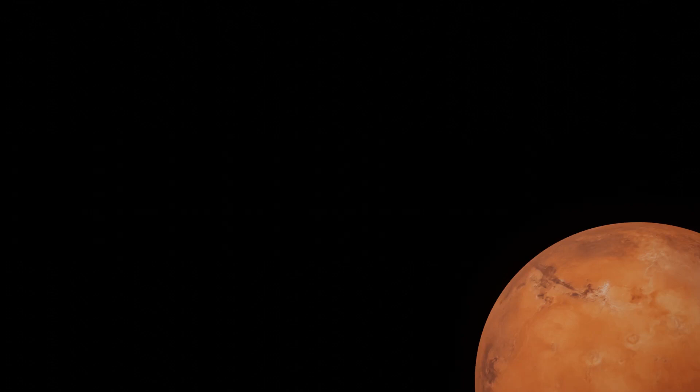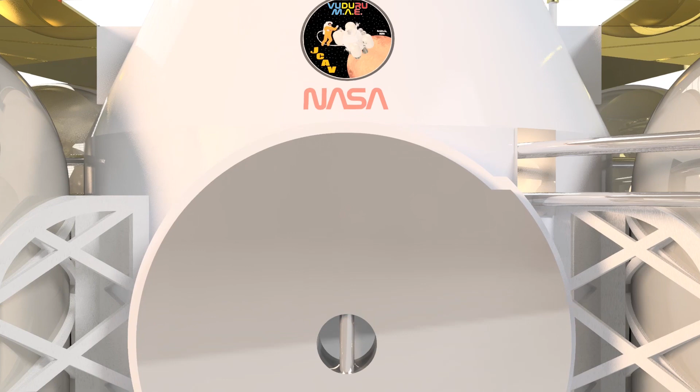All space exploration missions come from some sort of magnificent aura of passion, hope, and curiosity. They consist of individuals who push all kinds of barriers, whether in space or right here on Earth. For a mission as special as bringing the first humans to Mars, our team wanted to dedicate our name to Mae Jemison, who was the first in many aspects.

She was born in 1956, a time when racial segregation and injustice was vibrant. Despite the overwhelming societal obstacles, she became a member of NASA, aboard the Space Shuttle Endeavour, and launched in 1992. She was the first Black woman to reach space. For marginalized people like myself and many others, she became more than just an inspiration. She was proof that we can ascend beyond the structures that hold us down.

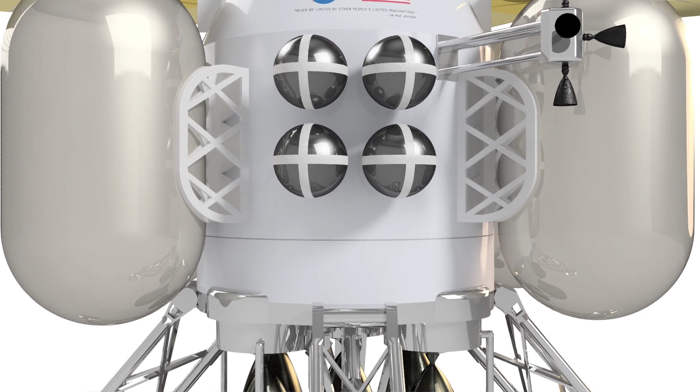As such, her acronym fits perfectly with our mission: Mars Ascent Expedition, Mae Jemison Crew Ascent Vehicle, JCAV. Featured as a decal on our vehicle, Dr. Jemison once said, 'Never be limited by other people's limited imaginations.' That is exactly what has driven us forward in designing and presenting the JCAV for you today. And for Dr. Jemison, thank you very much.

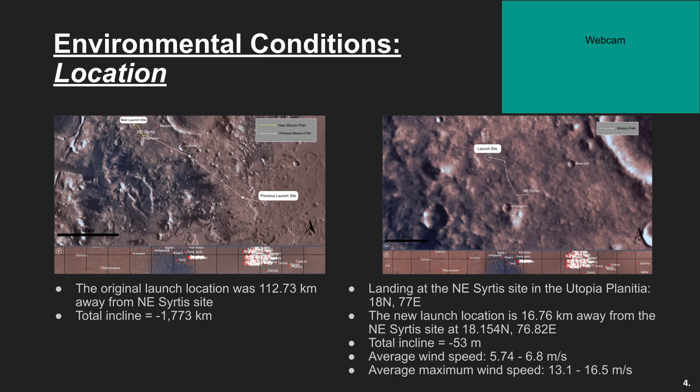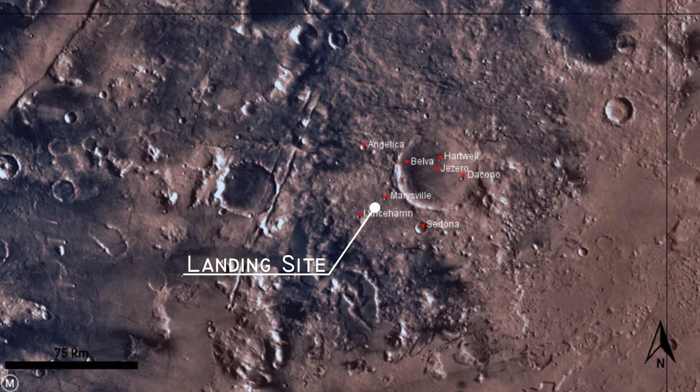The Mae Jemison VUDURU team has decided to conduct a mission around the Northeast Syrtis site, located at 18 degrees north and 77 degrees east near the Utopia Planitia region of Mars. Previously, our launch site coordinates were about 112 kilometers from NE Syrtis, with a total incline of 1,773 meters.

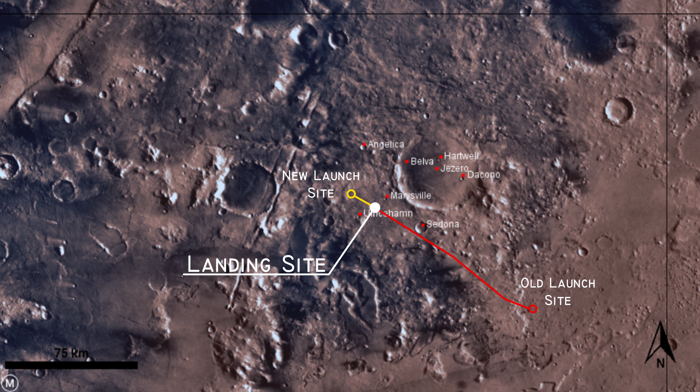In an effort to improve mission efficiency, a closer launch location was chosen. The new launch coordinates are 18.154 degrees north and 76.82 degrees east. This location was chosen because of its distance to NE Syrtis, which is 16.76 kilometers, its smaller incline of 53 meters, as well as its relative flatness. Along the path, the average annual wind speed measures about 6 meters per second, and the average maximum wind speed values can reach up to 17 meters per second.

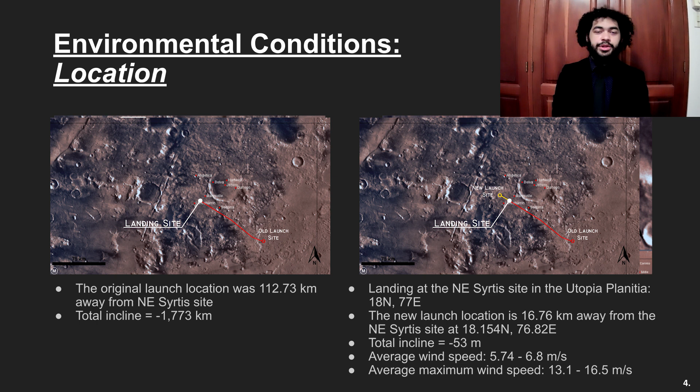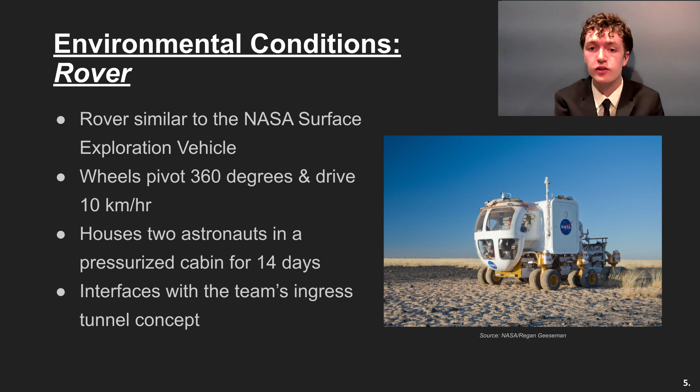The rover that the astronauts will use is based off of the NASA Surface Exploration Vehicle, a vehicle concept currently being tested. The rover wheels can pivot 360 degrees and drive 10 kilometers per hour in any direction. It houses 2 astronauts in a pressurized cabin for 14 days of living. The vehicle must also interface with the team's ingress tunnel.

Being a candidate for Mars 2020 landing sites, NE Syrtis offers a few geological features that make it a scientific region of interest. The overwhelming majority of the region is filled with surface and subsurface iron and magnesium clay, which is most likely aqueous in origin. Other regions around Syrtis are scattered with layered sulfates, olivine carbonate variably banded formations, crater-retaining mafic-capping rocks, and low-calcium pyroxene-bearing mounds. The abundance of minerals at the site suggests that it is a possible location for past life.

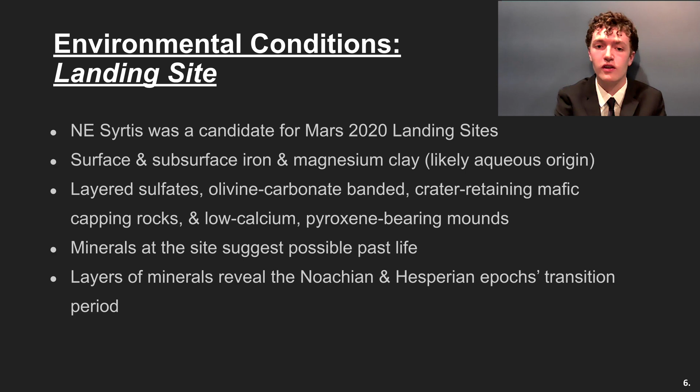The history of the site is revealed by studying the layers of minerals, which illuminates the transition period between the Noachian and Hesperian epochs. Studying the site would reveal much about the radical changes occurring during this transitional time.

The mission depicts that the Mars Ascent vehicle will launch from Earth on April 11, 2033 on the SLS and land on the surface of Mars on December 26, 2033 at a solar longitude, or LS, of 303.5 degrees. The mission will last for 30 days, so the crew will be on Mars until a solar longitude of 320.9 degrees.

This is optimal because certain regions of the northern hemisphere of Mars are the warmest during the Martian northern hemisphere winter, which occurs at an LS of 270 degrees and is just after the Martian perihelion, which is an LS of 260 degrees. The temperature will also be higher at the NE Syrtis site because it will be experiencing some of the lowest albedo values in the region.

The Mars Ascent Vehicle will be set to launch when the ERV reaches a true anomaly of 14.1 degrees with respect to the reference direction or apse line, which will be normal to the launch site. The MAV orbit will have an orbital inclination of 18.154 degrees and a launch azimuth of 90 degrees. This will put the MAV in the same orbital plane as the ERV, helping avoid extensive maneuvering. The MAV's orbit will form a 90-degree angle from its apse line to the intersectional node line between its orbital plane and the equatorial plane of Mars.

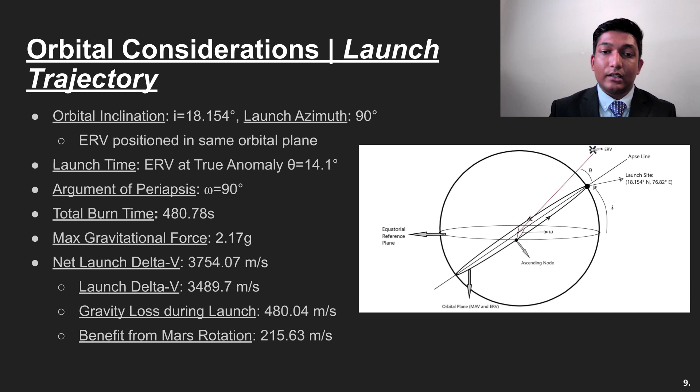The initial launch will take approximately 481 seconds to complete until orbit is achieved, and the maximum gravitational force experienced by the MAV during ascent will be 2.17 Gs. Due to the effect of Mars's rotation and the loss of gravity during ascent, as the MAV arrives in its 125-kilometer parking orbit, the net launch delta V will amount to approximately 3.75 kilometers per second. The low density of the Martian atmosphere will make drag a nearly negligible force, even during the MAV's ascent below the Kármán line up to an altitude of 80 kilometers.

So here's our specific mission profile. To start off, after doing surface operations and sample collections for most of their 1 month stay, the crew will begin launch preparations and will enter the MAV as they prepare for liftoff.

The MAV will then launch into the 125-kilometer orbit, requiring a total burn of 3,754.1 meters per second. After getting into the 125 by 125-kilometer orbit, the MAV will first complete one whole orbit around Mars, during which the crew will do sensor calibrations and perform checks to make sure everything in the MAV is working properly. After this, as the MAV finishes its one orbit and approaches its launch point again, the ERV should be at an angle of 2.79 degrees with respect to the MAV.

At this moment, the MAV will do its first orbital burn to enter into the Hohmann transfer orbit of 125 by 200 kilometers, requiring a delta V of 19.2 meters per second. If all the launch and burn times have gone successfully so far, the MAV will then remain in this orbit for about half the orbit, and as the MAV approaches the apoapsis of the transfer orbit, the ERV should approach the periapsis of the 200 by 200 kilometer orbit.

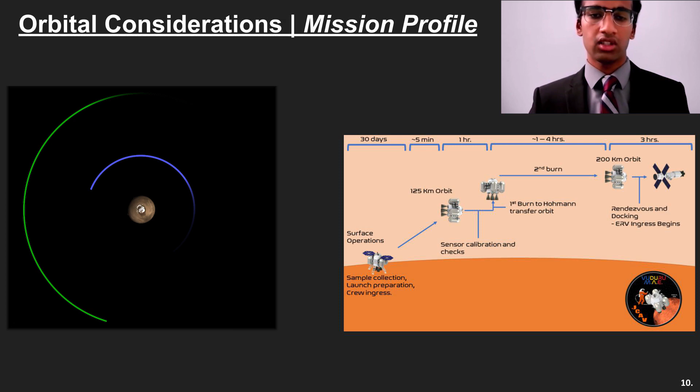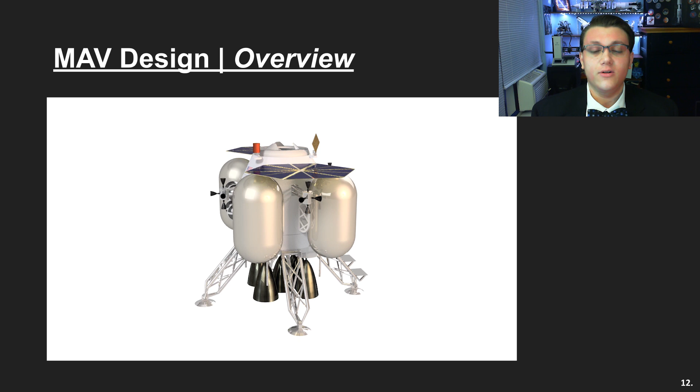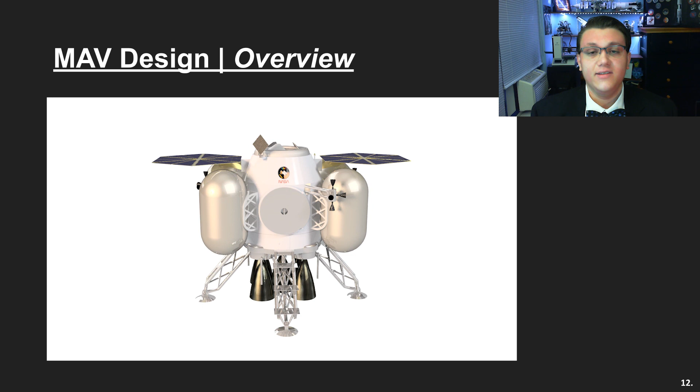The JCAV has two major configurations, surface and orbital. On the surface, the JCAV's primary functions are to keep itself powered and to provide a space for sample storage. To keep its batteries powered in the surface configuration, JCAV is equipped with 2 deployable solar panels along with a suite of communications in order to stay connected with the ground stations on Earth. The JCAV's other surface objective of sample storage is achieved by an innovative sample storage system that provides the crew with over half a cubic meter of compartmentalized storage space that can be accessed and filled from the Martian surface anytime during their 30-day excursion.

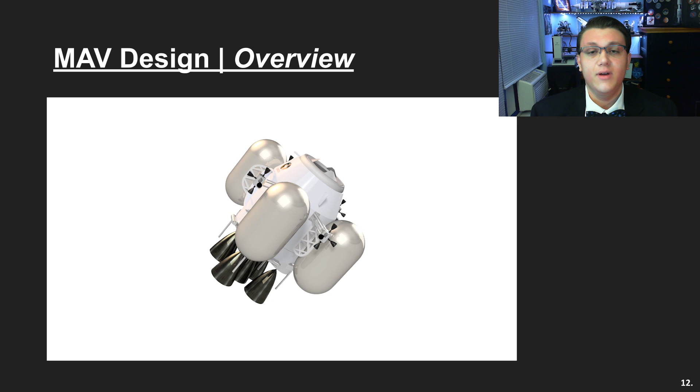The orbital configuration of the JCAV, while similar to the surface configuration, has a few key differences. Before launch, the surface communications and the solar panels are removed, and during launch, the landing leg structure is left on the surface. During launch, while in orbit, the JCAV heavily relies on its innovative propulsion system. Another key element of the orbital configuration is the crew cabin, which has an inner diameter of 2.3 meters and a height of 2 meters. On top of the crew cabin features the NASA docking system, allowing for easy interfacing with the ERV in orbit.

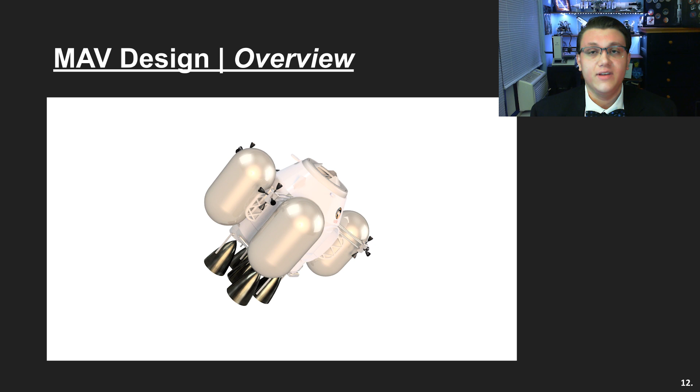A major constraint on the minimal Mars Ascent Vehicle theme was the dry mass of 5,000 kilograms and 15,000 kilogram wet mass, for a total limit of 20,000 kilograms. Therefore, a considerable amount of effort was spent tracking the mass of components in the JCAV design and attempting to save or cut down on mass wherever possible. The current design of the MAV has a total dry mass of 4,136 kilograms, including crew and 100 kilograms of samples, though a much larger mass of samples is likely possible. The propulsion team has determined that the full 15,000 kilogram propellant mass will be required.

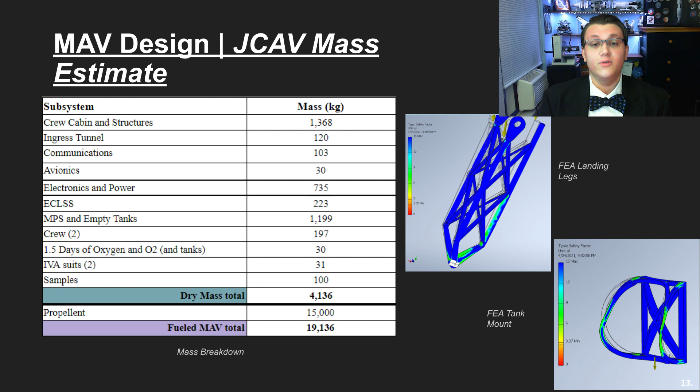This leaves the JCAV with an estimated mass of 19,136 kilograms at 17% mass margin on the dry mass. In order to save mass on team design components, finite element analysis was used to save upwards of 500 kilograms on structural components, while still maintaining a safety factor of 2.

The innovative storage system on the JCAV is designed to maximize storage flexibility and volume. To accomplish this, the storage system will be an isolated pressurized section of the JCAV, including a dedicated dust mitigation system. Functionally, the sample storage system consists of 16 hermetically sealed storage containers placed on a rotating base for one-at-a-time access. The storage system has 2 access hatches.

The surface access hatch is placed under the side hatch and can be used throughout surface operations and directly filled from the Martian environment. During launch and orbital operations, the sample storage system will be pressurized and a dust filtration system will be active to mitigate any dust which may have entered the system during surface access.

In orbit, the crew can access the storage system via a hatch on the floor of the crew cabin, allowing the crew to transfer the samples into the ERV if desired.

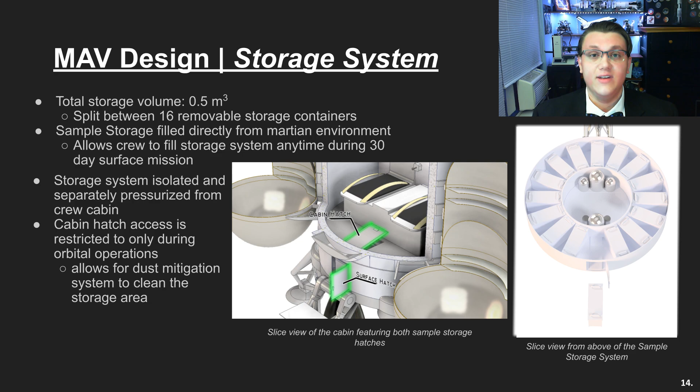A major feature of the surface configuration of the JCAV is the crew ingress tunnel. In order to enter the crew cabin, the crew will utilize an inflatable pressurized tunnel. This method of ingress keeps the crew completely isolated from the Martian environment and allows for mass savings on the JCAV because this method removes the need for a dedicated airlock system.

However, the ingress tunnel assumes and is dependent on the existence of a pressurized rover able to accommodate 2 crew while also being able to interface with the ingress tunnel. As mentioned by the environmental team, current Mars mission architectures include a rover that meets these requirements needed for the JCAV.

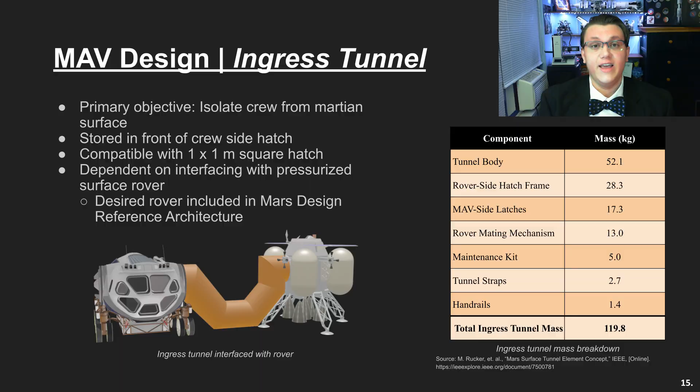The JCAV mission features an innovative propulsion design based on some heritage components. The MPS, or Main Propulsion System, called the MAVES system, or Mars Ascent Vehicle Engine System, is a custom design fully developed with deep space missions in mind. The RCS, or Reaction Control System, is based on the R4D engine used during the Apollo missions, however modified to have a new propellant combination and a higher performance.

The mission requires a total of 3,810.49 meters per second of delta V. However, the propulsion system is capable of producing over 5,091.25 meters per second of delta V at the max mass allotment of 20,000 kilograms. However, the JCAV vehicle is under 20,000 kilograms, which means our actual delta V is greater than 5,091.25 meters per second, meaning that the safety factor is actually 1.5, which is the required amount for a NASA human-rated space mission.

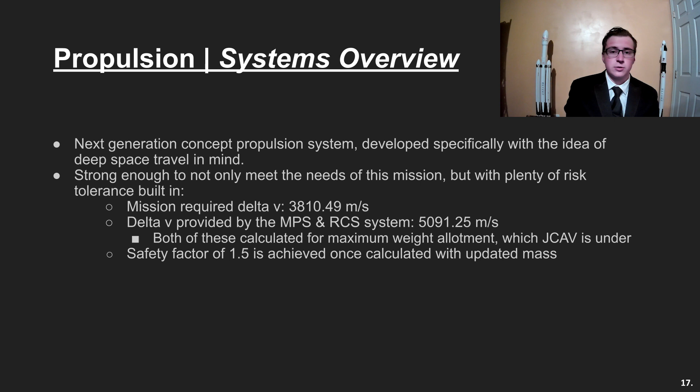When deciding on propellant selection, in situ resource utilization, noted as ISRU required fuels, were heavily strayed away from due to the increased mission complexity that ISRU requires, and the Q&A session with the judges detailed that ISRU should not be relied upon unless for a very good reason. This is reflected in our star chart as shown, and through this, a non-liquid oxygen propellant combination was chosen.

Comparing traditional hypergolic or storable propellants, dinitrogen tetroxide, noted as N2O4, and monomethylhydrazine, noted as MMH, were looked at for their past usage in systems that had very high performance. In the modern day, pure N2O4 has been switched with a mixed oxide of nitrogen, noted as MON. This is a percentage of N2O4 mixed with a percentage of nitric oxide, noted as NO. What was analyzed is 75% N2O4 and 25% NO by mass.

The addition of NO allows for a significantly lower freezing temperature compared to pure N2O4. This is much more similar to the freezing point of MMH, while the usage of MON also reduces the corrosion ability of pure N2O4.

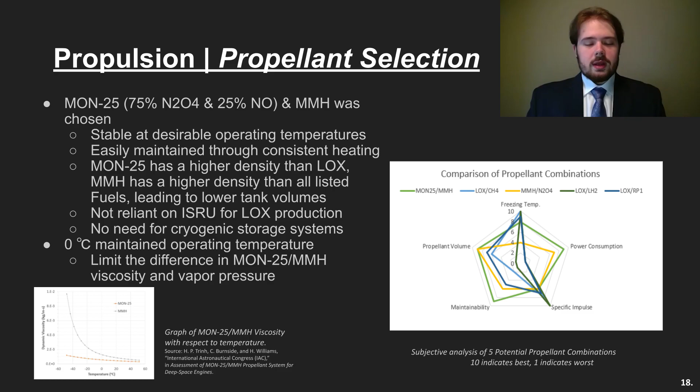The MAV engine was carefully designed to fulfill the propellant needs and the performance necessary to complete the rendezvous with the ERV. In addition, the MAV was restricted by height due to the transfer tube. Each MAV will have a thrust of 20 kilonewtons.

Utilizing a gas generator cycle provides a high chamber pressure of 1100 psi. In combination with an expansion ratio of 400, this allows the engine to produce a vacuum ISP of approximately 334 seconds and a ground ISP of 327 seconds.

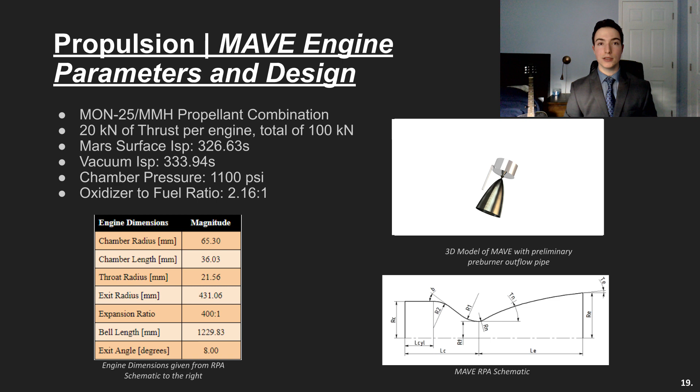For gimbaling, each engine is equipped with 2 electromechanical actuators to allow for an 8-degree range in the pitch and yaw axes for total control of the vehicle on ascent. The reaction control system, or RCS, of the MAV contains 4 thruster quads situated on each corner of the MAV, for a total of 16 RCS thrusters.

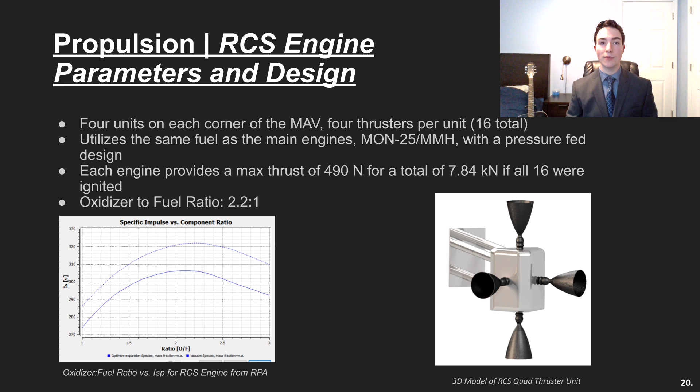This orientation provides complete control of the vehicle during orbital maneuvers and adjustments. The RCS also utilizes the same propellant as the MAV, but with a pressure-fed design. One thruster produces a max thrust of 490 newtons, and the system has an oxidizer-to-fuel ratio of 2.2 to 1.

The MAV will consist of 8 nested propellant tanks, 4 dedicated to the MPS and 4 to the RCS. The MPS tanks are evenly spaced around the MAV to optimize volume allocation while maintaining a balanced center of mass.

Contained within these tanks is a helium pressurization system which will allow for controlled pressurization of the tanks during flight. The tanks are manufactured using an aluminum lithium 2195 alloy to mitigate the risk of storing hypergolic propellants in close proximity to one another due to the nested tank design. In addition, the tanks are insulated using a 2-layer system of multi-environment, multi-layer insulation, or MEMLI, developed by Quest Thermal.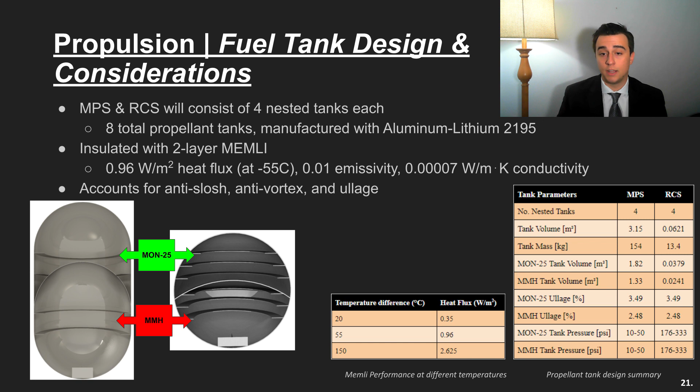are loaded into the tanks on Earth. The tank sizings also account for anti-slosh, anti-vortex, and ullage requirements. The anti-vortex baffles will prevent gases from entering the engines that could cause stalling or some other malfunction, which could lead to a critical engine failure. Without one, the flow velocity would be non-uniform along the flow path of the fuel and oxidizer and could allow vapors into the engine. The design for these baffles is a simple cross over the drain pipes within each of

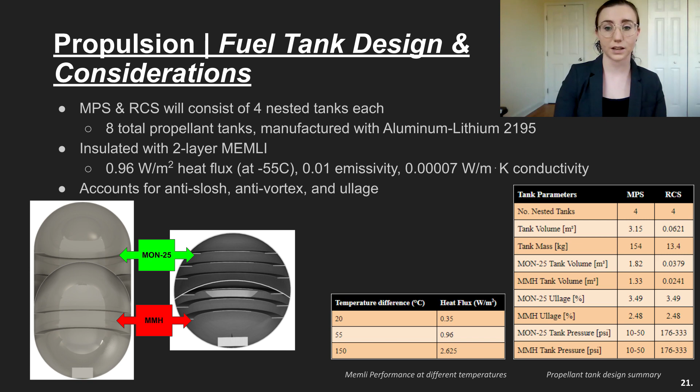these tanks. The anti-slosh baffles will provide damping to the liquid propellants during the launch and flight. They are flat rings evenly spaced in each of the tanks in order to control the movement of the fluid while the vehicle is in motion. The flat ring baffles will help to maintain structural integrity and stability of JCAV during flight. Both the anti-slosh and anti-vortex baffles will be constructed out of an aluminum alloy similar to the material of the body of the tanks. The landing site temperature averages negative 55 degrees Celsius.

However, MON 25 has a crystallization concern just below negative 40 degrees Celsius and a propellant freezing point just below negative 50 degrees Celsius. Additionally, MMH has complications with its variation in viscosity at low temperatures. This can be solved with an aforementioned passive insulation system and an active heating system, which keeps the temperature of both propellants at 0 degrees Celsius. To maintain the 0 degrees Celsius fuel temperature, an active heating system is necessary alongside the insulation.

The heaters chosen are all polyimide etched foil patch heaters on the aluminum lithium tank exterior just below the insulation, with a single aluminum side to increase heat spread. The selected patch heaters are an innovative alternative to classically used Kapton film patch heaters, due to their abilities to provide higher wattage per surface area and to operate at very low temperatures with little degradation or loss of performance.

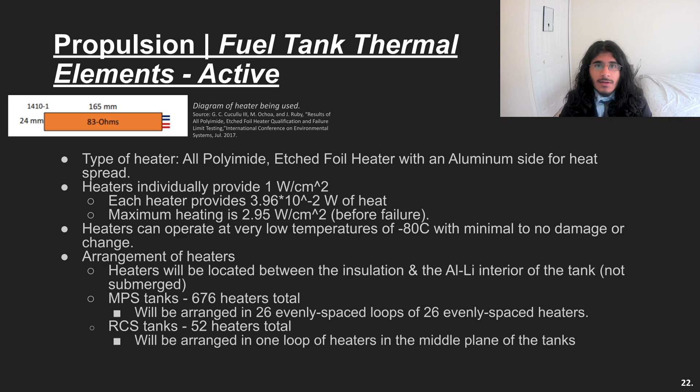Each heater will provide a maximum of 1 watt per centimeter squared of heat, which is a value corrected from the technical paper, and heaters in our system will be arranged in 2 different ways for MPS tanks and RCS tanks due to the differences in volume and surface areas. Furthermore, to ensure functionality, every other heater in a loop will not be utilized except in the case of failures and significant loss in resistance, which is highly unlikely as the heaters are not put under significant stress. The heaters will use a computerized system based on thermocouples within the tank to determine when they should be activated and how many should be activated to ensure efficient use of resources.

During the launch profile of the JCAV vehicle's mission, the astronauts will feel a maximum of 2.64 Gs. The mass reduction will be 30.57 kilograms per second during the MAV burn, 0.62 kilograms per second during the RCS burn, and the maximum velocity will be 5,146 meters per second.

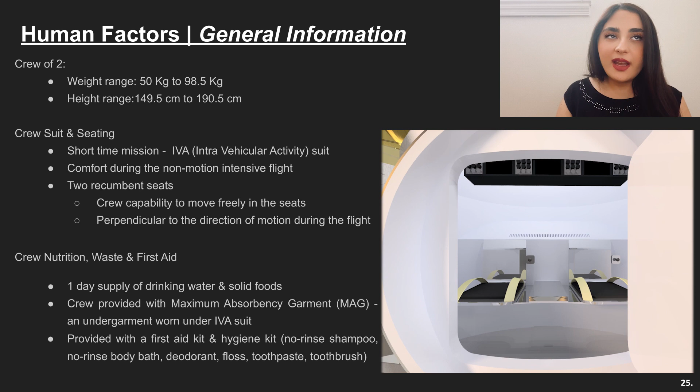With a relatively short mission duration, many extensive human factors considerations can be avoided with reference to NASA STD 3001. This includes extensive waste treatment systems and large stores of provisions. The MAV will support a crew of 2. Both astronauts will wear an IVA suit and will use maximum absorbency garments, MAGs, during the mission. The recumbent seating arrangement allows the G-load to go through the crew's chest and minimize the effects of the launch.

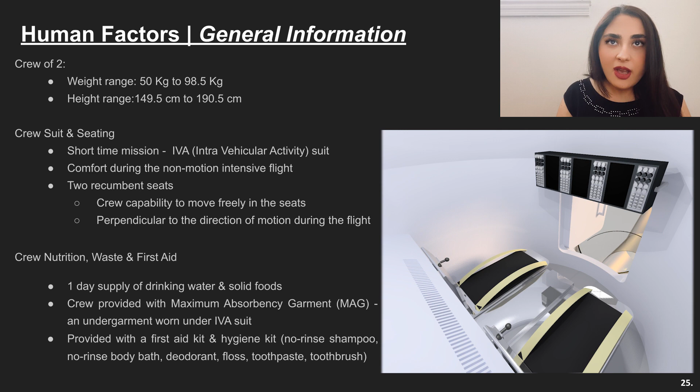In accordance with NASA's STD 3001, there is a 1-day supply of food and water, first aid, and hygiene kits for the crew. Items such as no-rinse toiletries, including shampoo and body wash, deodorant, and dental care are included.

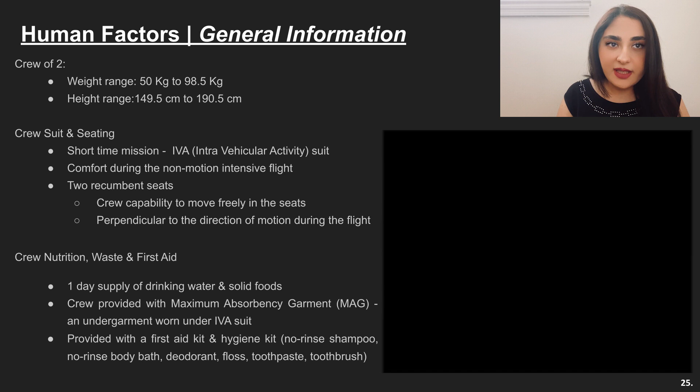Beyond the required consumables, there are several inner cabin systems that need to be considered for the crew's safety. The respiration system stems from a single nitrogen gas tank and oxygen gas tank that will provide 1.5 days of breathing for the crew at 1 atmosphere of pressure.

Dust mitigation will be performed by a filtration system, and crew members will be required to change into an IVA suit before boarding in order to further reduce this risk. An optimized absorption system of lithium hydroxide is utilized to remove carbon dioxide and other similar toxins.

Finally, a smoke detection network can identify multiple fire signatures and other hazardous gases. The cabin will be equipped with a fire elimination system consisting of water-based foam to combat onboard fire.

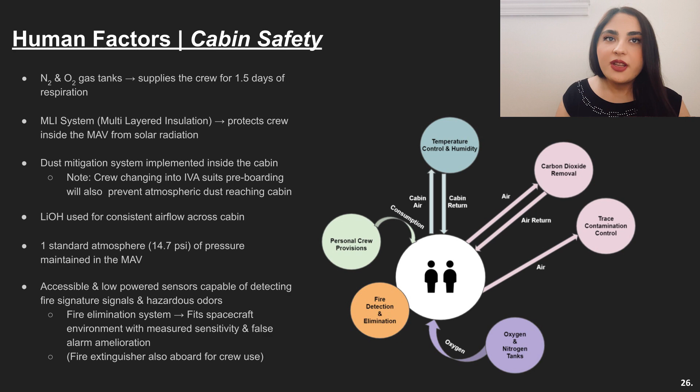Keeping the cabin at a comfortable temperature of 21 degrees Celsius is crucial to ensuring the well-being, satisfaction, and vitality of the crew. This will be performed by both active and passive methods. The active heating system utilizes heating patches attached to the cabin wall, providing primary heating. Meanwhile, the passive system of multi-layered insulation provides insulation as well as protection from external radiation.

Excess heat will be removed from the cabin by a dual-loop system. Heat will be transferred to the environment from the cabin by a series of tubes in the wall using both water and alcohol. Fans circulating the cabin air will also provide some temperature stabilization as well as air circulation.

It is important to note that most of the life support and cabin essential systems mentioned are optimized versions of the ones found on the International Space Station and Space Shuttle missions.

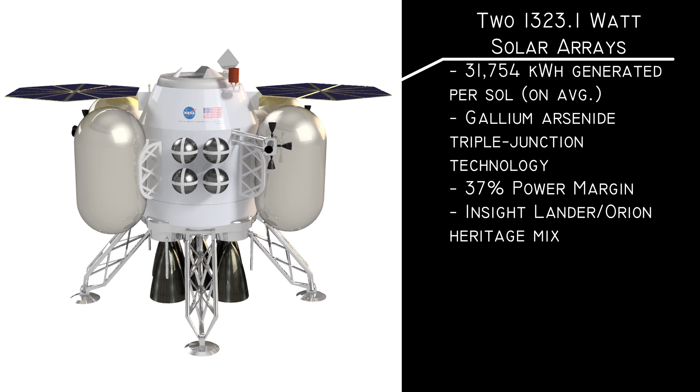The electrical power for JCAV is sourced from 2 solar arrays featuring gallium arsenide triple junction technology, utilized in both the InSight lander and Orion multi-purpose crew vehicle, with each circular array producing upwards of 1,300 watts and the average sol having 12 to 13 hours of sunlight.

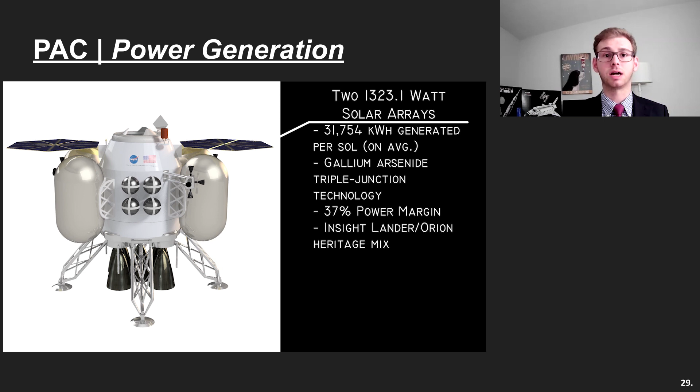Approximately 31.75 kilowatt hours per sol are generated. Only 63% of such will ever be used, leaving 37% in excess power to accommodate for any added inefficiencies in generation, such as dust accumulation.

Energy is stored in 5 120-volt, 55 amp-hour batteries, totaling 33 kilowatt hours stored. These lithium-ion batteries use similar cells designed for Orion and are produced by EaglePicher, who feature an expansive space heritage. The JCAV will alternatingly draw from 2 of the 4 main batteries, with the 5th as a redundant backup.

While on the Martian surface, for launch and orbital operations, only 3 batteries will be needed at maximum.

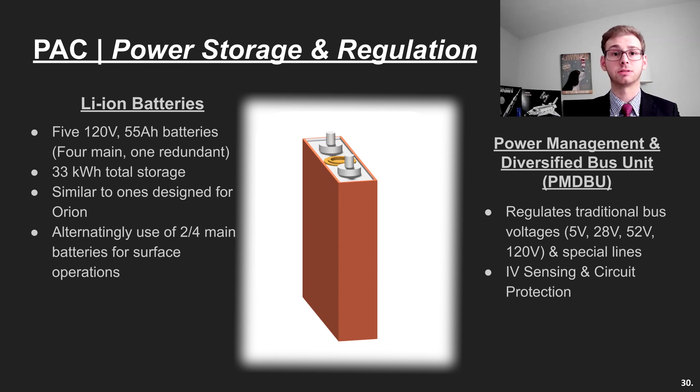The Power Management and Diversified Bus Unit, PMDBU, will regulate and distribute power at the 4 traditional voltage buses of 5, 28, 52, and 120 volts, as well as any other specified lines needed. The PMDBU includes current voltage IV sensing, as well as circuit protections to ensure as smooth operations as possible.

JCAV's power consumption can be broken down into 5 modes: daytime surface operations, nighttime or sleep surface operations, and the 3 orbital rendezvous attempts. The power budget shown has been slightly adjusted from the technical paper to correct marginal wattage misrepresentations. With all modes accounted for, consumption will never exceed more than approximately 20,000 watt hours, leaving 37% in excess as mentioned previously.

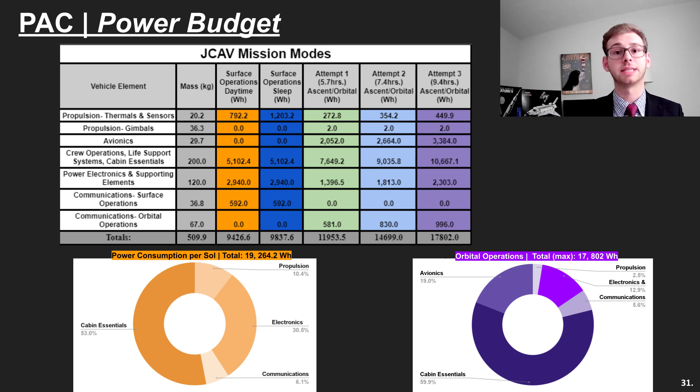While crew cabin elements consume the most in both surface and orbital operations, it should be noted that there is a built-in 10 to 15% margin for that budget specifically.

All of JCAV's functions are controlled by a modified FMZ 2000 flight management system from Honeywell. The crew will utilize a glass cockpit of 3 touchscreens with physical switches for critical functions only. A glass cockpit was chosen for the assumed heritage it will have from being used on Orion, as well as to minimize system mass and wiring complexity.

This will be backed up by 2 identical computers and 3 redundant touchscreens on an isolated bus from the main. Since the flight computer and user interface are based on the Orion system, this ensures reliability and reduces the unique training needed to fly the JCAV.

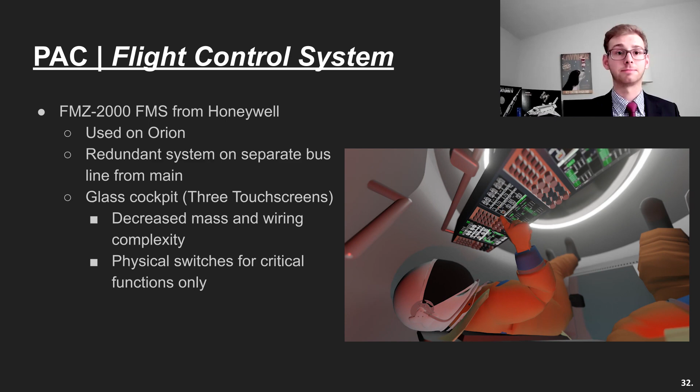On the Martian surface, JCAV will have 3 antennas for as many communication methods. The ultra-high frequency UHF antenna, also used on Perseverance, will transmit and receive data utilizing the Mars Reconnaissance Orbiter, MRO, as part of the Mars Relay Network. The MRO will then in turn transmit the JCAV data back to the Deep Space Network, DSN, on Earth.

MAVEN will be used as a backup relay. The Vehicle Orbiter Relay Link features rates of up to 2 megabits per second.

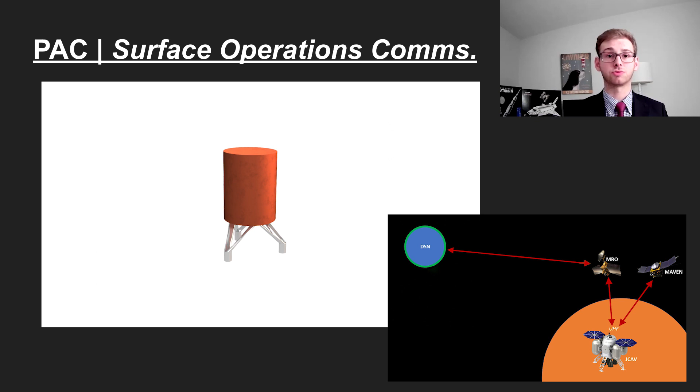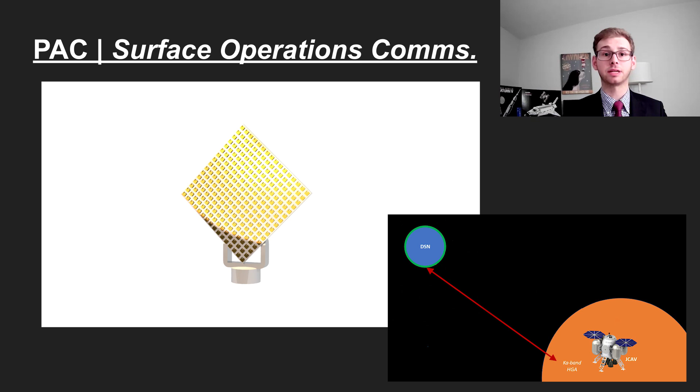The steerable Ka-band high-gain antenna stems from a patent-pending dual-frequency right-hand circularly polarized (RHCP) HGA design for the proposed Europa lander. It will perform direct-to-Earth link communication between the JCAV and the DSN.

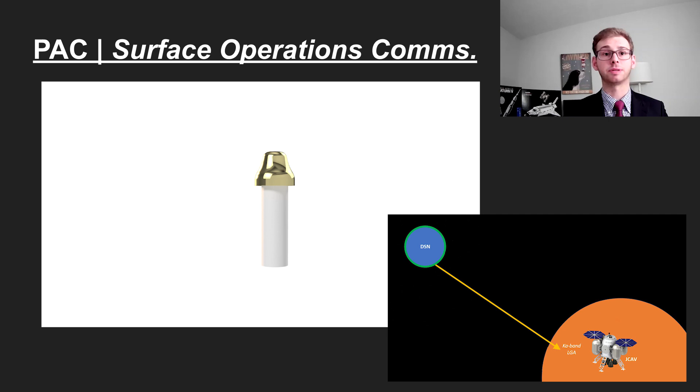There is also a Ka-band low-gain antenna (LGA), which plays a similar role to Perseverance's X-band LGA, being a rugged link for receiving direct data and commands from the DSN. It should be noted that Ka-band is 4 times higher in frequency than the X-band currently being used on most Martian vehicles, enabling improved transmission rates.

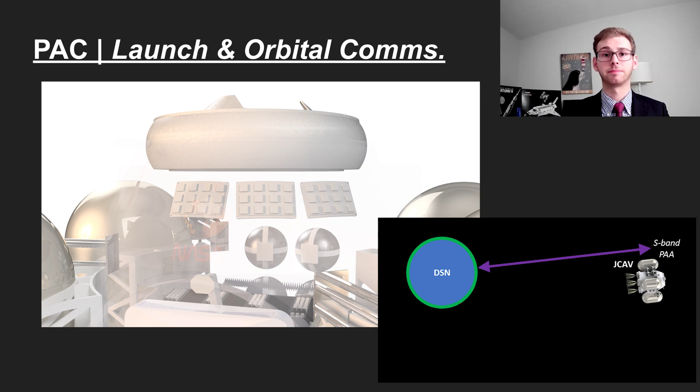For launch and in-orbit communications, the JCAV relies on Haigh-Farr and Ball Aerospace conformal S-band phased array antennas (PAAs), similar to the ones used on Orion. They will perform direct-to-Earth link communications.

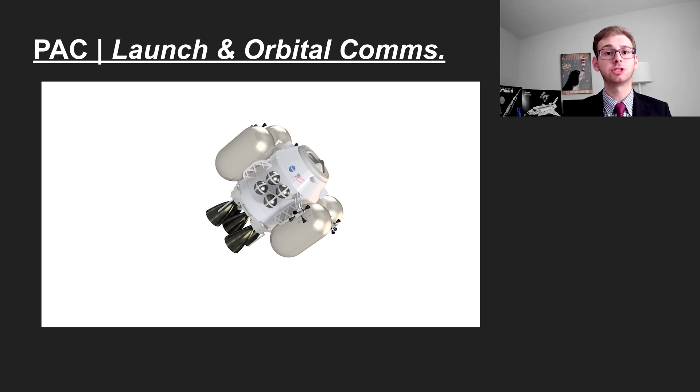Since aging Mars relay satellites are of concern to some, JCAV also features an experimental modular agile scalable optical terminal, or MASCOT, which will aim to demonstrate either optical relay communications with a future orbiter or direct communications downlink to Earth.

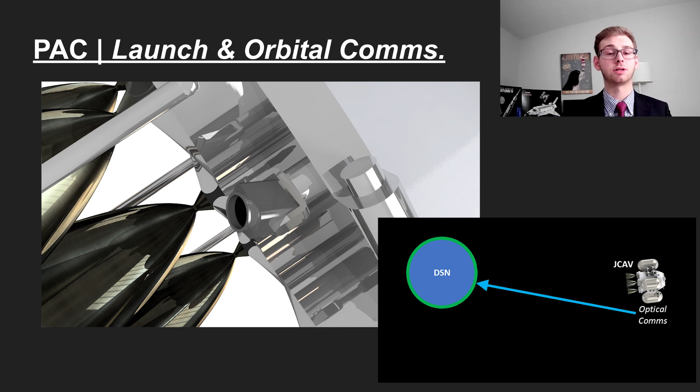In regards to the TRLs, or technology readiness levels, of the JCAV vehicle, there is a wide array of values. This is due to some subsystems being fully fleshed out components that already exist and have been flight proven, and some that need to be completely custom built from the ground up.

These current TRL values will be increased over the time that mission development occurs, and by the time the mission is go for launch, all the TRLs will be high enough to be used during a human-rated space mission. To ensure this, the team has decided to structure their timeline to support the lowest TRL items first and the highest TRL items last.

The JCAV mission features many commercial partners who have either already demonstrated technology, are in the process of demonstrating technology, or will demonstrate technology that fits the needs of the JCAV mission and ensures its completeness and success. These companies include Agile Space Industries, EaglePicher Technologies, Ball Aerospace, Haigh-Farr Incorporated, L3Harris Technologies, General Dynamics, Lockheed Martin, Quest Thermal, Honeywell Aerospace, SolAero, and Northrop Grumman.